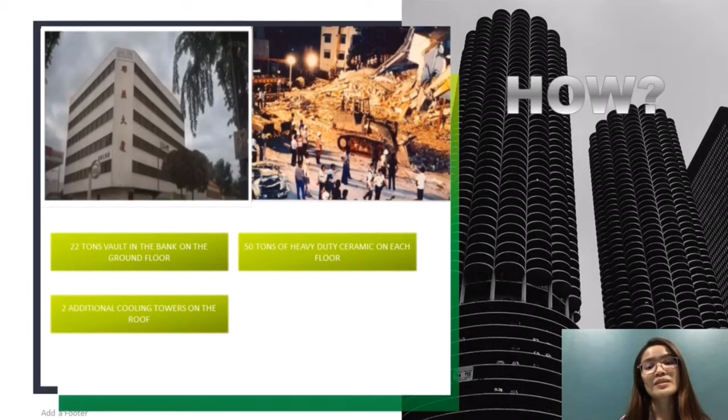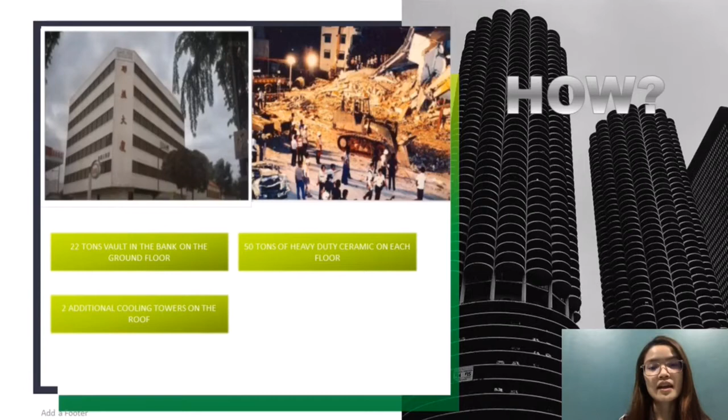To make things worse, proper maintenance wasn't really practiced on the building for 15 years. So defects and cracks were pretty obvious on the surface of the structures in the building. Even though they were treated, they were superficially treated, which means they weren't treated with much care, and the owners weren't really paying attention to the defects that happened in the building throughout the years.

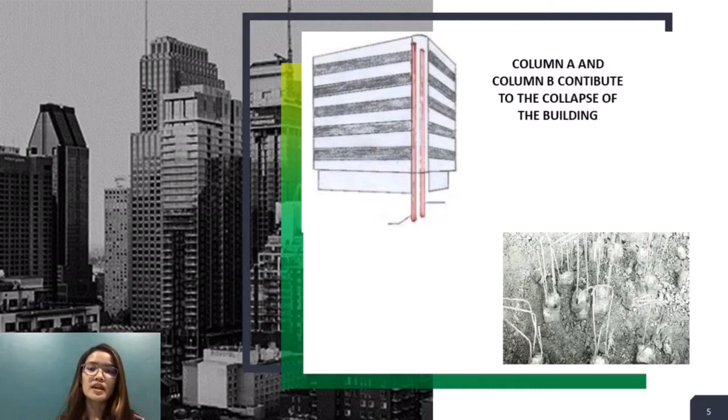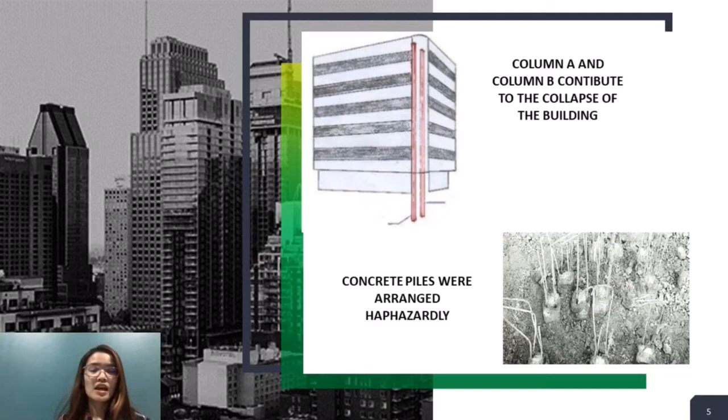Also, from the observations made by our team, it was observed that there were 2 columns that contributed to the collapse of the building, which are column A and column B from the figure here. It was caused by the overstress condition experienced by column A, and eventually it moved to column B, and thus it contributed to the collapse. We also found out that there was very poor construction practice on the concrete piles of the building, where the concrete piles were arranged haphazardly, and there were actually 11 piles instead of 9 piles.

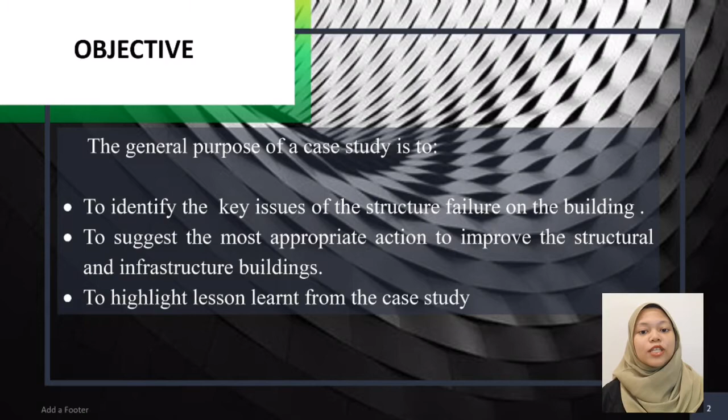Next, the objectives are to identify the key issue of the structural failure of the building, to suggest the most appropriate actions to improve the structure and infrastructure of the building, and to highlight the lessons learned from the case study. So these are the objectives of the case study conducted.

Hi, my name is Carmen. I'm going to present the material tests in the case study. In this case study, we assume that the building collapsed because material tests were not carried out during the construction process or after the construction process was done. Thus, our group suggests that non-destructive tests can be carried out on the building structure. This is because these tests do not destroy the building structure, such as when testing the strength of the concrete.

There are 3 types of non-destructive tests that can be carried out on the building structure: the electromagnetic cover meter, the rebound hammer, and the ultrasonic pulse velocity test. The electromagnetic cover meter is used to estimate the location of the shear reinforcement, main reinforcement, and the concrete cover in reinforced concrete. Besides, the rebound hammer is used to estimate the strength of the concrete through the rebound number. The larger the average rebound number, the greater the quality of the concrete.

Lastly, the ultrasonic pulse velocity test is used to determine the existence of cracks or voids in the concrete by measuring the pulse velocity through a solid material. High velocity indicates good quality of the material, while slow velocity may indicate concrete with voids and cracks. Therefore, non-destructive tests play an important role in checking the quality of concrete work so that maintenance work can be carried out to prevent the building from collapsing.

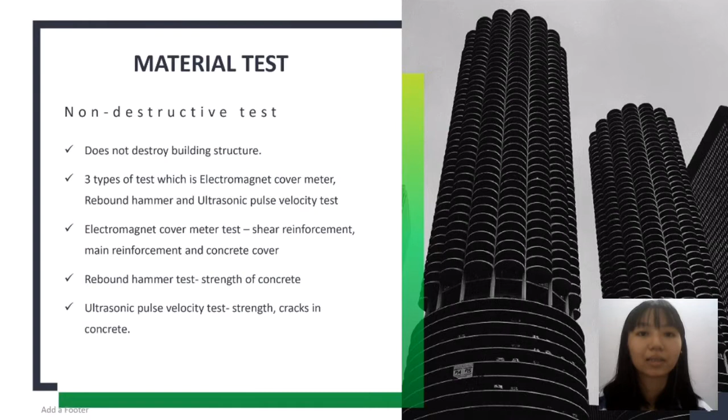Structural analysis is to determine the effect of loads on physical structures and their components. All structures that must endure loads, such as buildings, bridges, aircraft, and ships, are subject to this type of examination. To calculate a structure's deformations, internal forces, stresses, support reactions, accelerations, and stability, structural analysis uses applied mechanics, material science,

and applied mathematics. The analysis findings are used to validate a structure's stability for usage, typically by passing physical inspections. Structural analysis is thus an important aspect of structural engineering design.

There are 6 basic steps for structural analysis: 1. Plan of structure, 2. Type of structure, 3. Applied load, which includes dead load, live load, and wind load, 4. Structural analysis, 5. Structural design, and lastly, deflection. It is very important to determine all the loads that are added, as it can prevent the building from having excessive loads that will affect the strength and stability of the structure.

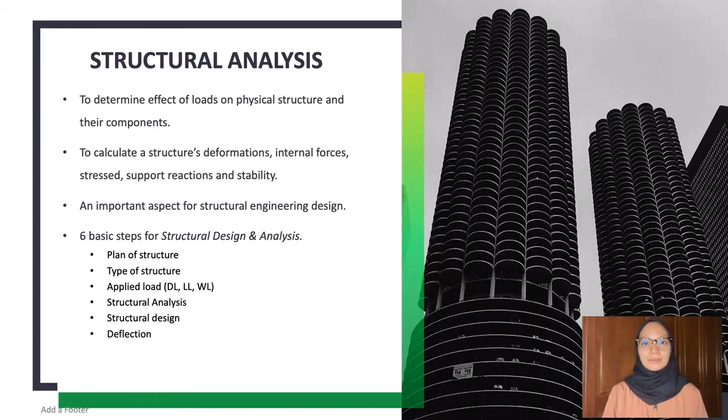In this case study, the main cause of the building's collapse is structural failure due to additional loading being added without concern for the limit of the structure to withstand the extra loadings. For example, between 3 to 8 years after completion, cracks were already visible on walls, but no actions were taken by the owner. The columns had micro cracks as well. It then affected the openings of the building. The reason for these cracks is the extra 50 tons of heavy-duty ceramic added on each floor and the additional cooling tower.

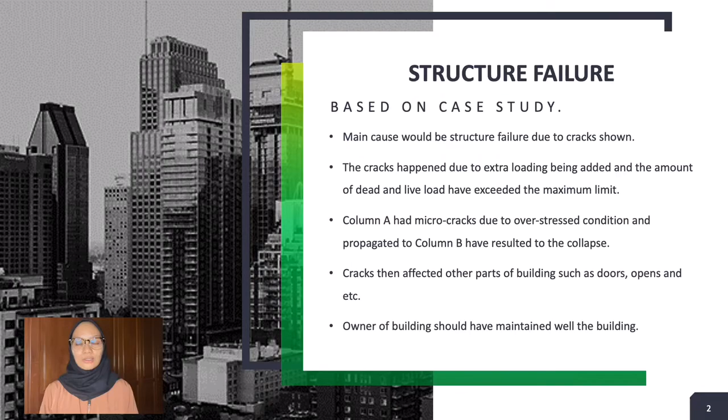The lesson that we can take from this incident is, as an owner of a building, we should maintain the building well, as it involves other people's safety and lives. Always consult engineers if there seem to be problems with the building, as they can help solve them. Based on this case study, it was found that proper maintenance was not really practiced on the building by the owners for its lifespan of 15 years. One of the main purposes of maintenance is to ensure that the building can be operated well.

Based on the observation made by our team, defects and cracks on the structure seem to be one of the main deteriorations of the building. Cracks on the surface might be a sign of distress in non-structural or structural members. They might be caused by shearing, separation of joints, excessive deflection of support, and also separation of members built with different materials. The cracks were visible on every floor of the building, located either on the slab, the masonry wall, or junctions of the columns.

For surface cracks or non-structural cracks, elaborate measures are not required since they only appear on the surface. To repair them, the render surface can be removed and the cracks in masonry can be cut and filled with cement mortar with a ratio of 1:4, and the surface will be plastered again after that. As for heavy cracks, the wall will be considered beyond repair and usually needs replacement. If the cracks are very obvious all over the external load-bearing wall, along with signs of settlement, the old wall has to be demolished and rebuilt part by part.

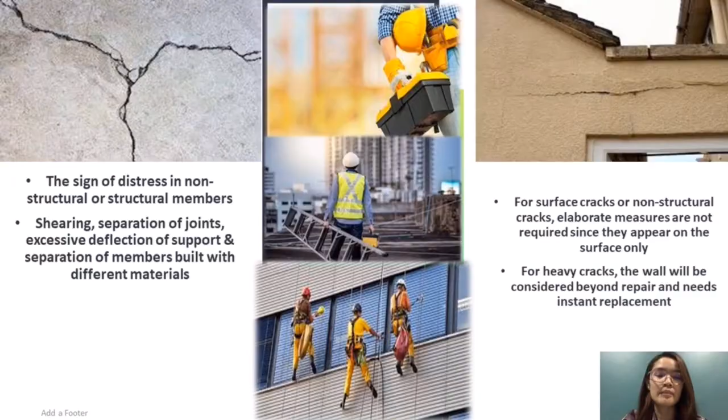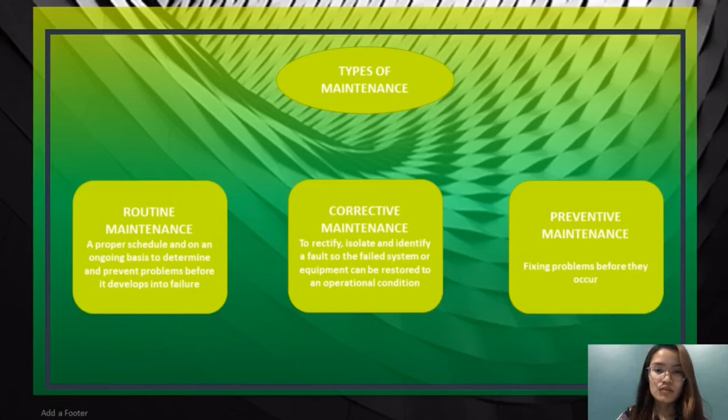Other than the maintenance needed to minimize defects or cracks on structural members, maintenance of the building can be done as a whole, and it should be done frequently and considered by all building owners to preserve the state of the building and ensure that it can be operated well in the long run. There are different types of maintenance that can be carried out to serve this purpose, namely corrective maintenance, routine maintenance, and preventive maintenance.

Let's take a look at building by-laws. Building by-laws are the set of rules that a developer has to abide by while developing a project. Building by-laws also contain rules to ensure that there is minimum harm to the environment as a result of development.

Okay, based on UBBL 1984, in the structural alteration or the extension of the building, the loads to which any building will be subjected, the dead load, the imposed load and the wind load, shall be calculated, and if the actual imposed load to which the building will be subjected will exceed the imposed load calculated in accordance with this part, such actual load should be substituted for the load.

Next, the provisions stated in this part regarding the dead load and the imposed load should be applied to new buildings, structural alterations and additions to existing building structures, and also existing constructions on a change of use. This provision cannot be applied to the maintenance or the replacement of parts of existing buildings and structures where there is no change of use.

The dead load shall be calculated from the unit weights given in BS 648 or from the actual weight of the material used. Okay, based on the case study, we can see that the structural engineer ignored the provisions stated by the UBBL 1984 and the Building Control Regulation 1989, that any additional load, alterations or additional installation need to be consulted with the engineer in charge.

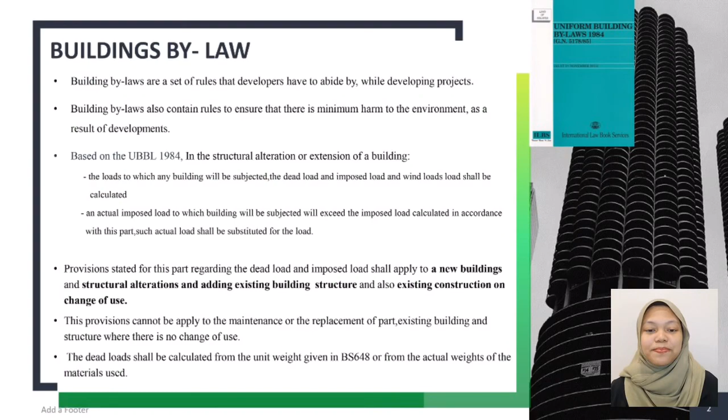Safety and Health. The Department of Occupational Safety and Health, which is part of the Ministry of Human Resources, is abbreviated as DOSH. Basically, the general responsibilities of architects, engineers and designers are outlined in the DOSH standard. Those who are responsible for the design and construction of any planned building or civil engineering works should pay special attention to the safety of the workers and the general public around the construction site at the planning stage.

Reasons of collapse. The main cause of the structural failure is that additional loads were added to the building. After the completion of the building, the owner himself added a total of 3 cooling towers to the roof. A 22-ton vault was installed in the bank on the ground floor, and certain outside layers on each floor of the building were fixed with heavy duty ceramic that carries a total of about 50 tons of weight for architectural purposes. Due to these loads, the building could not withstand them and eventually collapsed over time.

The next one is poor construction practice and maintenance. The investigation of the piles revealed that this building had poor building practices, with piles positioned haphazardly, which showed 11 piles instead of the expected 9 piles placed in one case, and also during the cracking stage no maintenance was done.

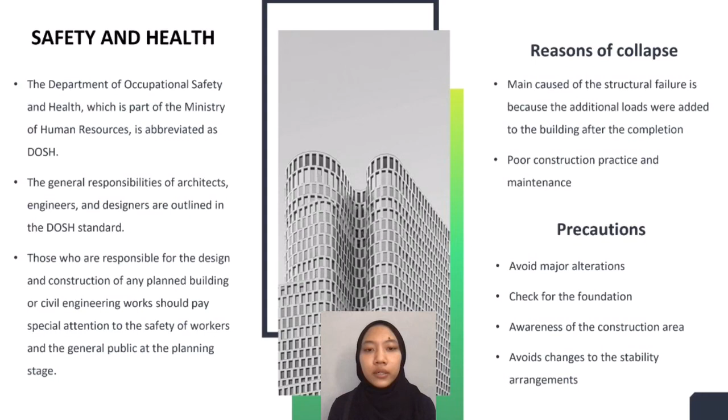As a lesson learned from this case study, structural design analysis is a very important step when constructing a building. Any additional load that exceeds the allowable load may lead to structural failure. One must take proper precautions before designing a pile foundation so that the possibility of failure is reduced. The fundamentals of engineering also need to be applied in all aspects.

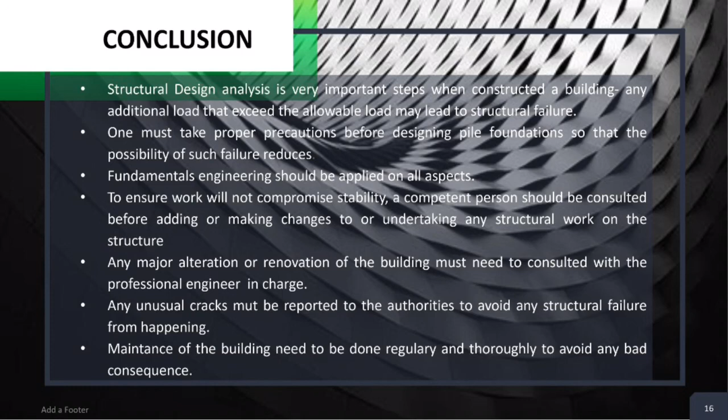Other than that, to ensure work will not compromise stability, a competent person should be consulted before adding, making changes to or undertaking any structural work on the structure. Any major alterations or renovation of the building must be consulted with the professional engineer in charge. Any unusual crack must be reported to the authority to prevent any structural failure from happening. Lastly, maintenance of the building needs to be done regularly and thoroughly to avoid any bad consequences.